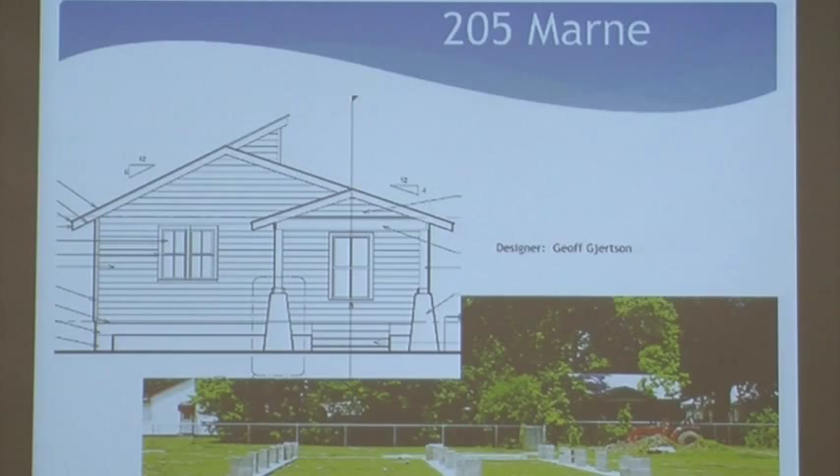Johnny Ogeron with LCG designed this house, a really great porch, and again elevated, and everything is insulated underneath with spray foam as well as the envelope of the house. This house also, lovely picture of the foundation there, was designed by Geoff, and there's some of the front elevations and the porch that you can see. That's the interior. One thing you can do in a small house to maximize the feeling of spaciousness is to add to interior volume, and that's what we've done with this particular home. So it feels a lot bigger than it is. That house is a 2-bedroom, 1-bathroom, and it's about, I think, 950 square feet minus the porches.

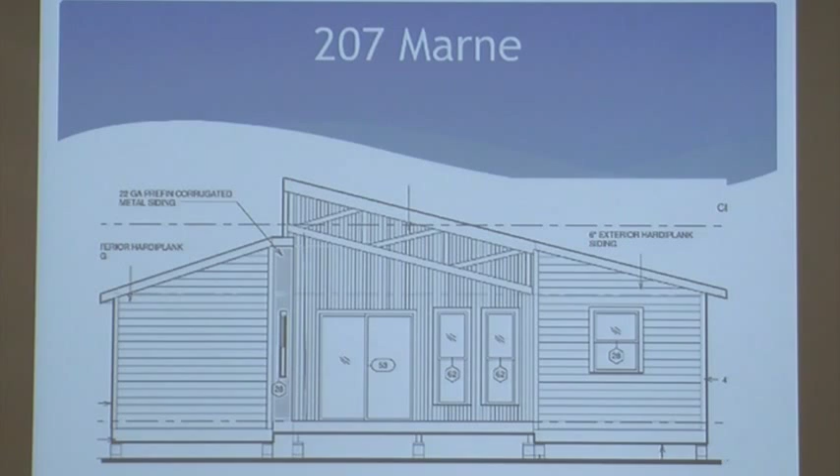And then finally, this was our last partnership with the School of Architecture and Design in the home building arena. This house was built for a very large family, and again, a very small footprint. This is a homeowner with 6 children, and it's a 4-bedroom house, but it's about 1,250-ish square feet. And everybody who lives there says it feels much bigger than that. So, basically that's what we do.

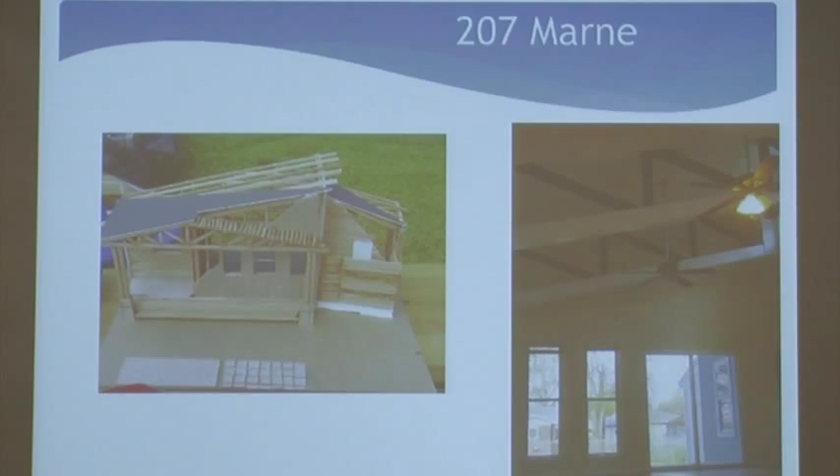And one more thing before I turn it over to Corey: the ultimate in energy efficiency is using what's already there. So in addition to everything else we do, we have a resale store at the Restore.

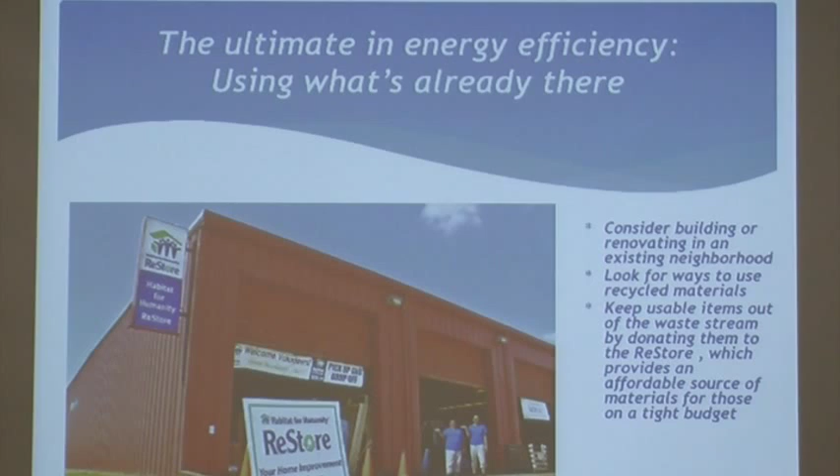Look for ways to use recycled material. Keep it out of the waste stream. Finally, donate it to the ReStore. If you're renovating, if you have a home project that you're doing, we'll take your gently used or new items and we'll resell them. And it's all benefiting our program and the community at large.

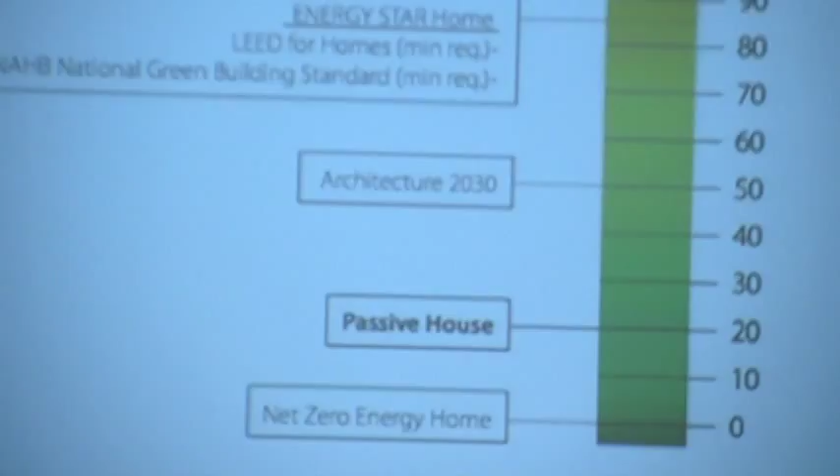And the humidity, I did a whole study on this, data logging the temperature, humidity, as well as the energy consumption. And we backed out a lot of really particular information about how difficult it is to design down here because of the humidity issue. So this is the only kind of data point, but this kind of puts passive house as the strategy. And if you follow those 5 points I just made, that can get you almost all the way to passive house, which, they claim, is a 90% reduction. In our climate, maybe 70% reduction.

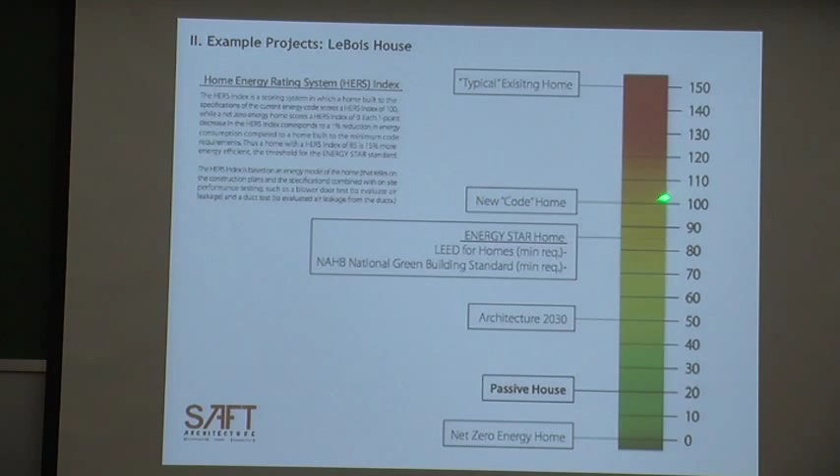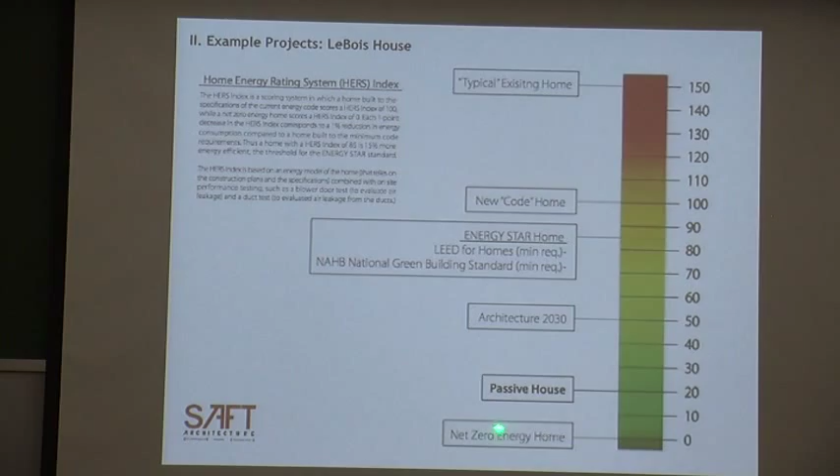But typical house now, on this chart, a new house built to code is 100. So that way any reduction from new codes is a direct percentage reduction. So an Energy Star home, I think, is 85. And so that comes right in there. And then Architecture 2030, which is an ambitious goal for energy savings, puts it down to 50% of current code-built houses. And passive house tries to get it down there. And then a net zero house would literally be at 0. So ambitious goals, I think, are doable.

So a quick look at the LeBois house. We did balloon framing, so this is a 3-bedroom, 2-bath house, and in between the first floor and the second floor, there's no collection of wood because the studs go all the way up, and we hang the second floor on the inside. We wrapped the whole house in polyiso insulation so that any thermal breaks that we had even after the advanced framing got reduced to almost nothing because there was a wrap of insulation around it.

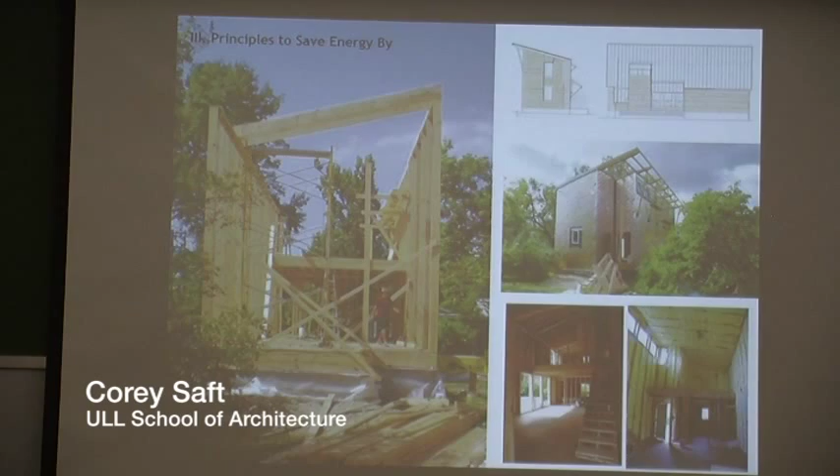And on the roof plane, we had 2 plies. And then the inside, we had spray foam insulation. So it was a tight, well-sealed envelope. And we used not quite triple pane windows, but double pane with a film inside of it. So we kind of followed these categories. This is a quick look at that idea of advanced framing.

So standard framing, which uses 16-inch on center 2x4s filled with insulation, has this much insulation, 65%, this much lumber, 25%, and then the voids, particularly the corners at the soffits, where you just can't get anything in there to insulate with, is 10%. And when you do optimum value engineering or advanced framing, you cut the lumber down dramatically and increase the insulation dramatically.

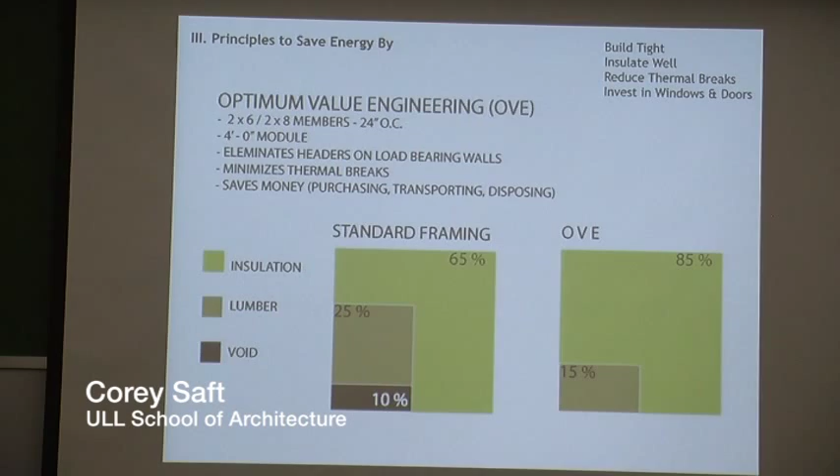So you save a little bit on lumber, and you get a lot better R value in your walls, and you have thicker walls. So when you make a decision to build, it's a basic decision that you can make, and there's lots of savings inside there.

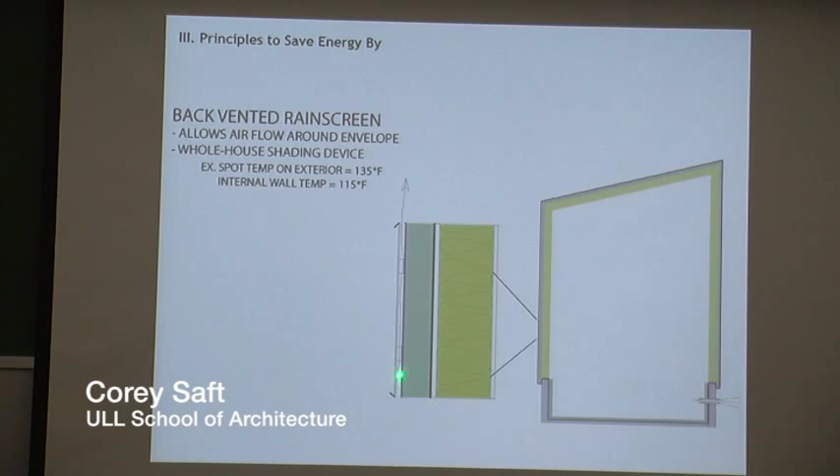We also did what we call a back-vented rain screen. So this is just a simplified section of that house, and then this is the wall assembly. You can see the siding right here is offset on sleepers, and that leaves a ventilable cavity. So it's Hardie panel on the outside, and then there's an airspace behind it, and it's open on the bottom and open on the top.

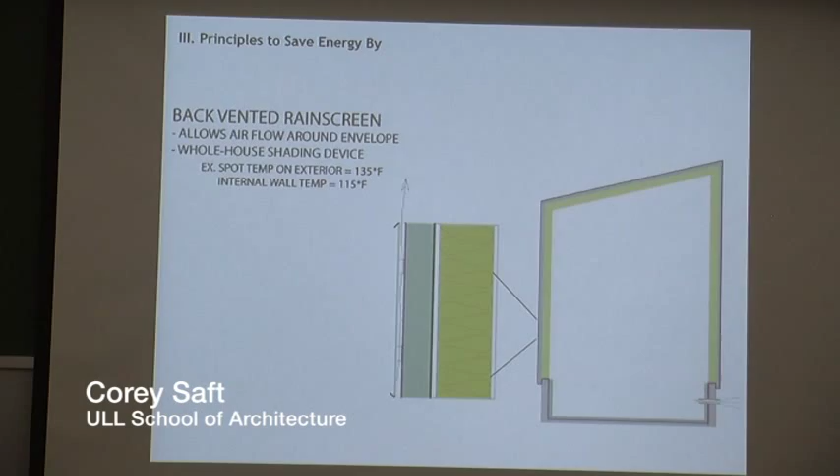Traditionally, it's called a back-vented rain screen, and the idea is that no matter how much you caulk your siding, it's always going to break down at some point. It's going to be a maintenance issue, and it's potentially a water issue. When you have a back-vented rain screen, it allows ventilation in there. The idea is that water's not a problem, unventilated water's a problem. Water's always going to get in, so this is the strategy to let that out.

In our climate, though, it has a dramatic second benefit, and that is it acts as a whole house shading device. The two passive strategies we have are shading and ventilation. So when you wrap a whole house with a small airspace, you're shading the entire house. The sun hits it, and whatever heat travels through there before it gets to the insulation vents out. There's a cavity, hot air rises and goes right out the top. So it's really an advantageous thing.

In a very informal way, with an infrared thermometer, when we were building this house, I took a temperature of about 140 degrees on the south side in July, and just sticking it up inside, it was 20 degrees cooler on the outside of the insulation because of that whole house shading device. So it costs a little bit more. You need sleepers on the side, and then put your siding up.

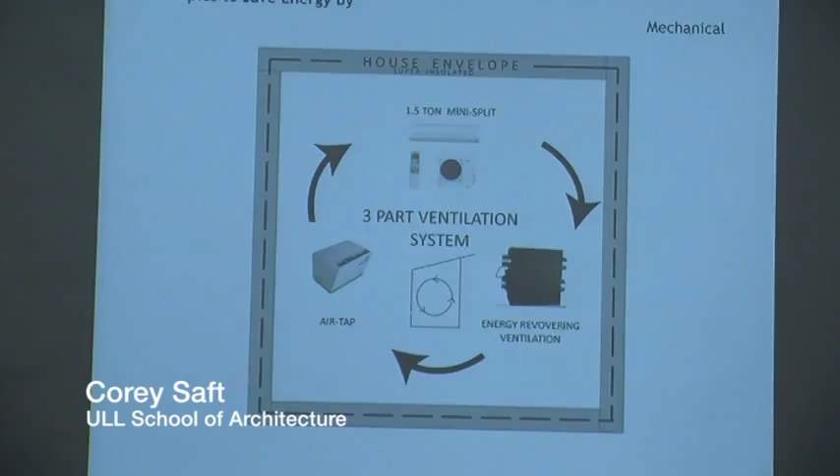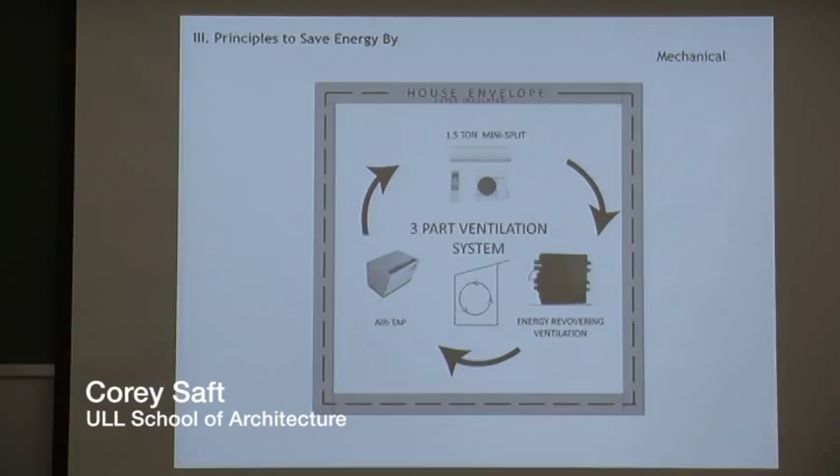It works great. And then this is the mechanical system for that. When you get small, we put a 1.5-ton mini split in there, and that's really the only air conditioning and heating. When we did the energy analysis, 1 ton would have been enough. It's an 800 square foot footprint. It's double height, so only half of it's a double height space, half of it's the bedrooms. So you end up with 1,600 square feet, and this actually has a basement.

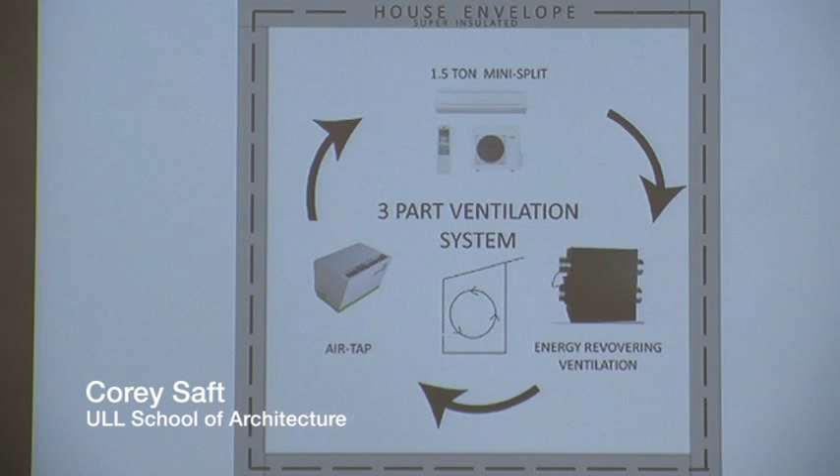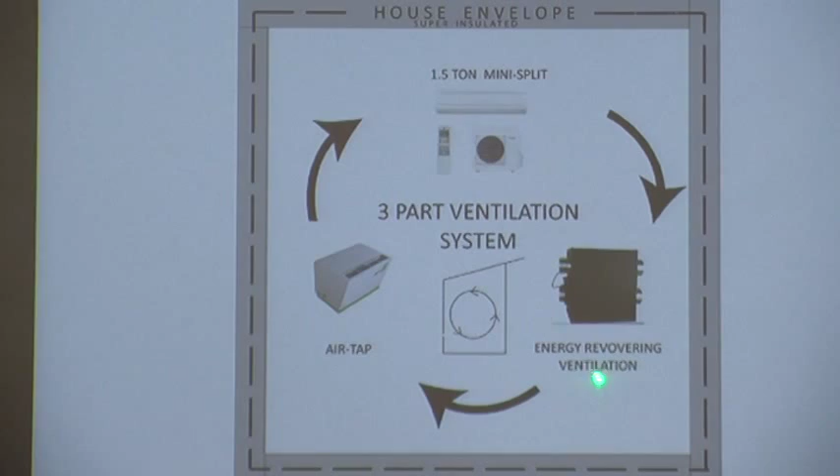It's an above ground basement. So it's a house on slab, but we raise everything up 4 feet, where a lot of the ducts and everything run underneath there, but it's part of the conditioned envelope. So it's the equivalent to a 2,000 square foot house. We have a 1.5-ton mini split in there, and we have what you call an energy recovery ventilation system. So that manages the fresh air.

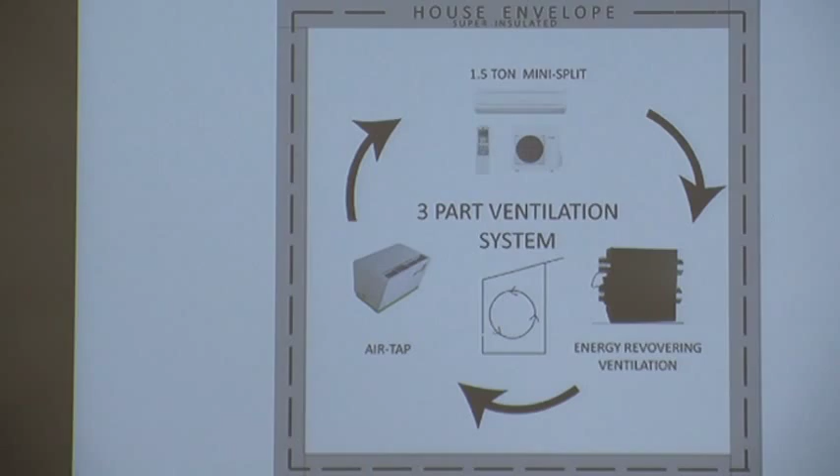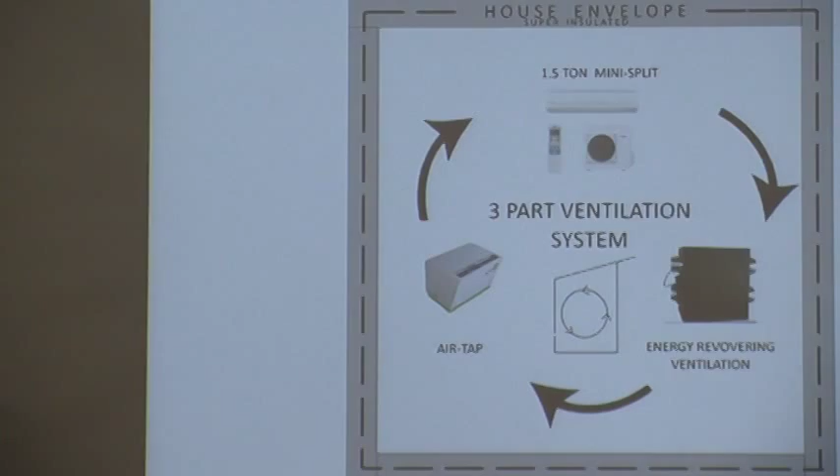And this is a big deal: once you cool and air condition the inside of the house, if you want to get fresh air so you don't have sick building syndrome, you've got to get fresh air from outside in. That means you have to take all the stuff that you cooled and dehumidified and dump it outside. So you're constantly taking hot humid air from outside and cold dehumidified air from inside and switching them.

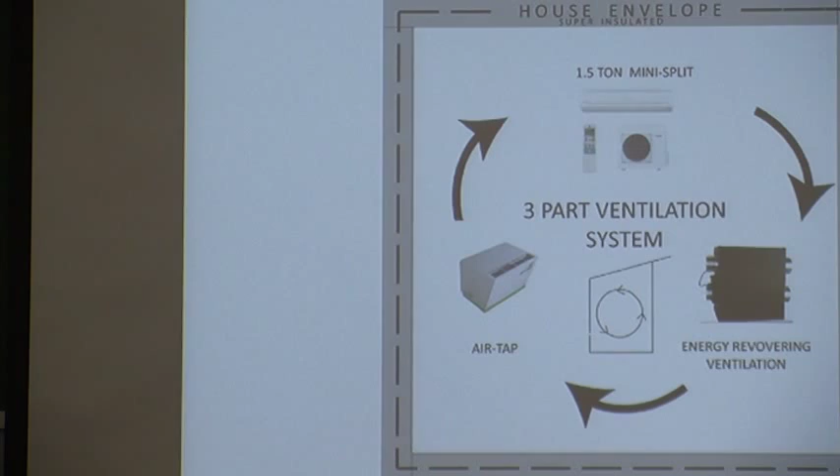So that machine, which just runs on a 110 plug, actually recovers a lot of that energy, the dehumidification and the cooling inside there. So you can run this, and a lot of times we don't have to run the mini split, not in the dead of summer, but in the shoulder seasons, the fall and the spring, and that will actually maintain the inside condition for a long period.

And this is actually an aftermarket element that was talked about today. This goes on top of a water heater, and this one's made in Houston, but it's an air-to-water heat pump, which you can now buy on water heaters. But we have a water heater, and we put this right on top. It sticks into it. We pull out our 220, which is a huge energy consumer, and we plug in this, which is a 110, and it's just like a window unit.

When you have a window unit, it takes the ambient air and splits it into hot and cold. It dumps the hot out its back, outside, and it dumps the cold inside, and so you get air conditioning. This does the same thing. Whatever we have inside the house, this takes that air, splits it into hot and cold, gives us an extra 7,000 BTUs of cooling and dehumidification, and dumps the hot in the water heater so we don't have to use 220. So on a 110 plug, we get 7,000 BTUs of cooling plus hot water, which is amazing, right? The downside is you can only use it when you have a place to dump that hot.

So if your hot water tank is full up with heat, you can't dump it, it won't run. So it's an auxiliary thing, it's not a main thing. So you have to be careful how you use it. So that's it. I'm not going to talk about this in detail, but we tracked it, we data logged this: total energy consumption, the mini split, net energy, the PV generation.

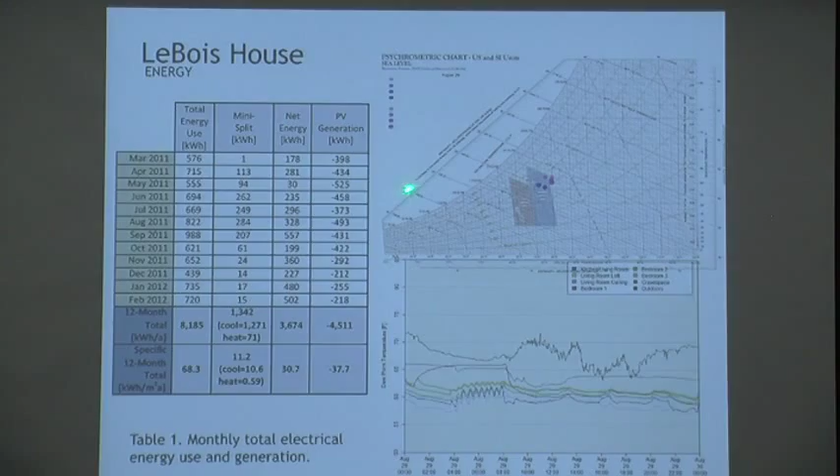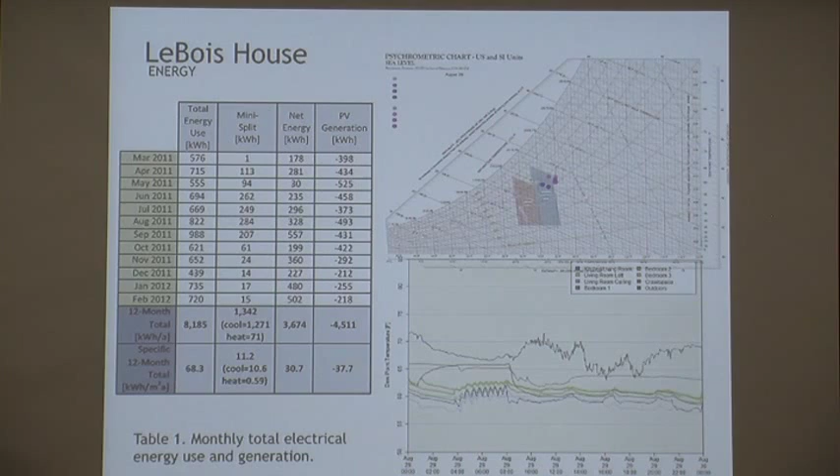We have thin film solar on top, a very small array, a little bit under 3 kilowatt solar array. And then we tracked it in very detailed amounts. We used a TED system, we charted it, and then we laid it out in a psychrometric chart, which puts a comfort zone, and we're able to really carefully watch through different times of day how it goes. So we did an 12-month study of this and tracked it really carefully.

Almost time? All right. All right.

So this, I'm going to skip right over. This is the Google Power Meter, and we can track it.

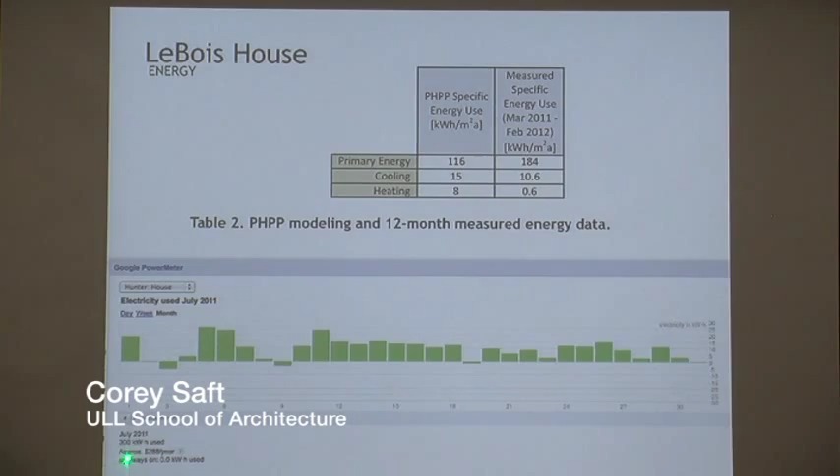All right. 2 minutes? 2 minutes? Go for it. 2 minutes. Yeah, all right.

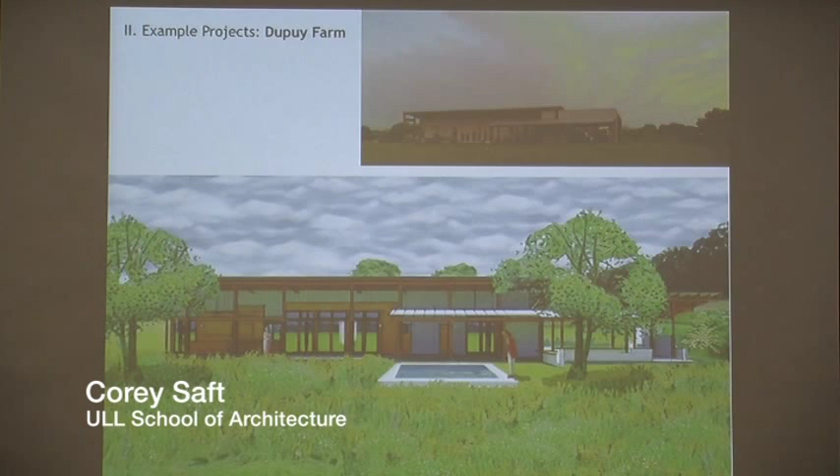The Dupuy House, built on those same strategies. This was built last year. Some basic principles: north, south, east, west orientation. So you always want your long axis when you build east and west, and then the short direction north and south, so that way you get a broad south side, which is easy to manage, you can shade. And then you get a big opening on the north side where you can have lots of windows because there's no direct sun, and you minimize the east and west.

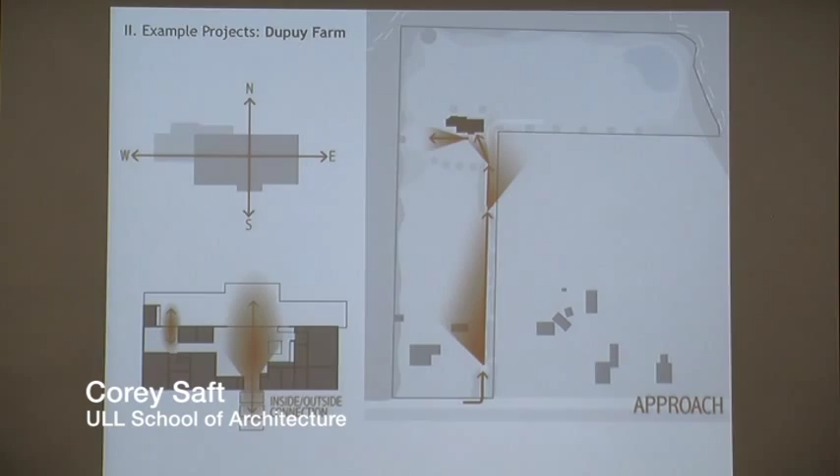Because if you've ever driven back and forth between here and Baton Rouge, if you go to Baton Rouge in the morning, the sun's right in your eye, and you turn down your shade, it's the most difficult way to manage. You can't block it, right? And when you drive home at sunset, same thing, it's kind of coming in there. So you don't want any windows on your east and west side, and you can avoid it. You want to maximize on the north and the south.

So shading and ventilation, this is the idea of it being well insulated, managing the overhang so that you can get the sun that you want and block out the sun that you don't. And so we basically made a house within a house. So there's like a whole shading device inside there, and then we open up to the north side.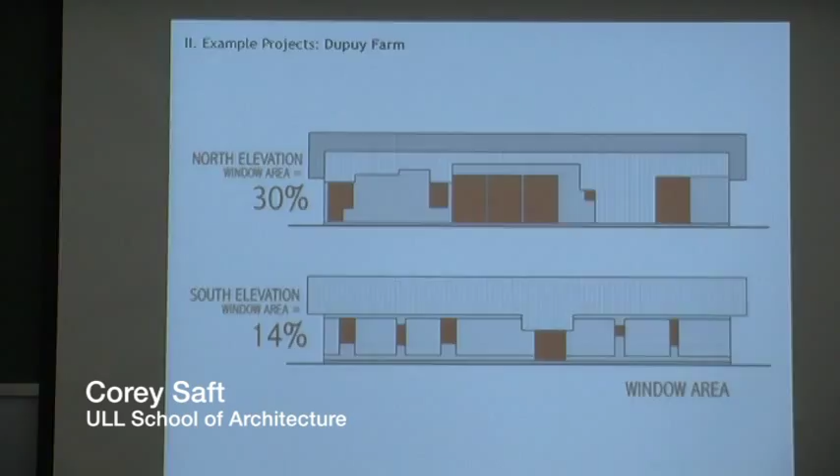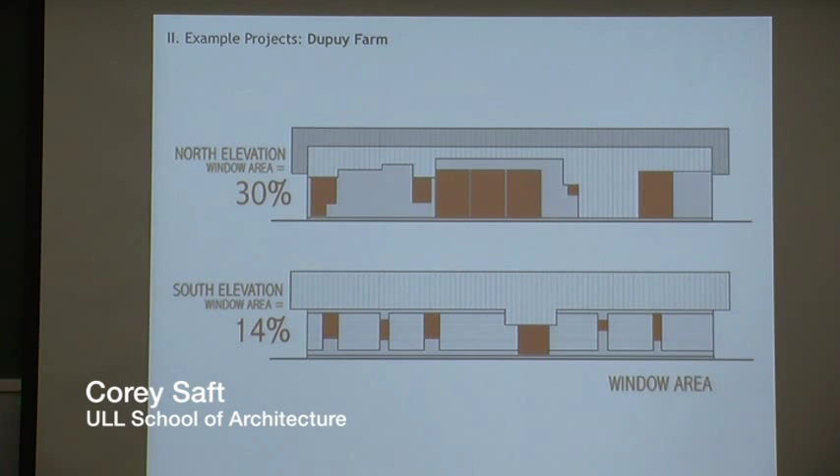I mean, this might be a little too detailed for this, but it's really important to track where you put your windows. It makes a lot more sense to have a real focused area where you have a robust amount of glazing so that you can get a real connection to the outside. But on the east and west, which I'm not showing here, have almost no windows if you do it.